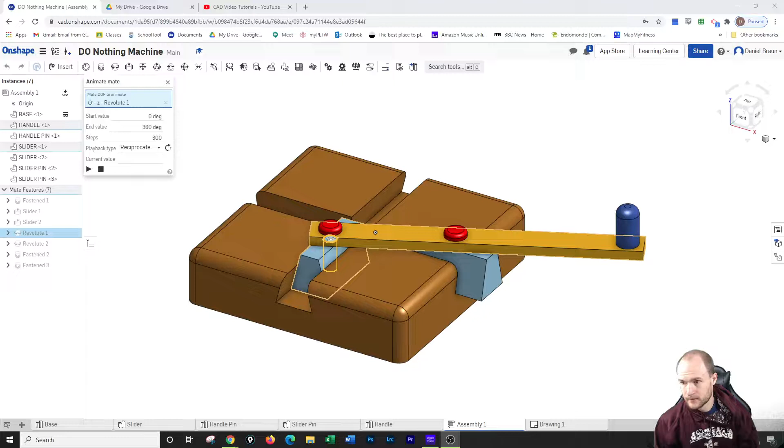Alright, so we're going to make this do nothing machine, and before I get started, I got this idea from this gentleman's channel, CAD Video Tutorials, and it's basically the same one he has. I made some minor changes in the way I draw it and some of the things I do.

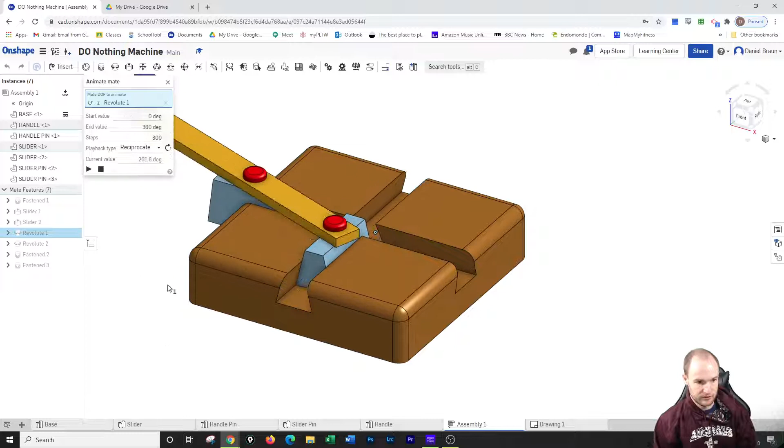If you are interested in other Onshape things, he has some good tutorials you can go check out. So, this is the do nothing machine. We're going to do this assembly, so we're going to draw all the parts, and then we're going to put them together and you'll be able to animate it like this.

So it's going to be our first step with assemblies. To do this, I made a folder, the do nothing machine, and then you're going to create a document. Different from Autodesk Inventor, you are going to actually be able to put everything in one document, which is really nice. So like this is the Part Studio one.

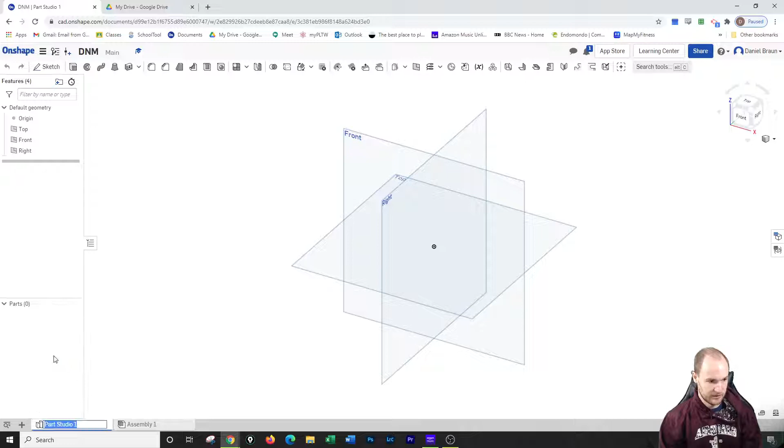I'm just going to rename this because this is going to be the base. So I'm going to make a video for each of the pieces. Moving on, so we're going to do the base first. So here is the base, and here are the dimensions for the base.

So everything we're doing is in millimeters because it just works out nice. So we're going to do 150 by 150. And then we're going to cut these grooves in. I've got a detail for the grooves here.

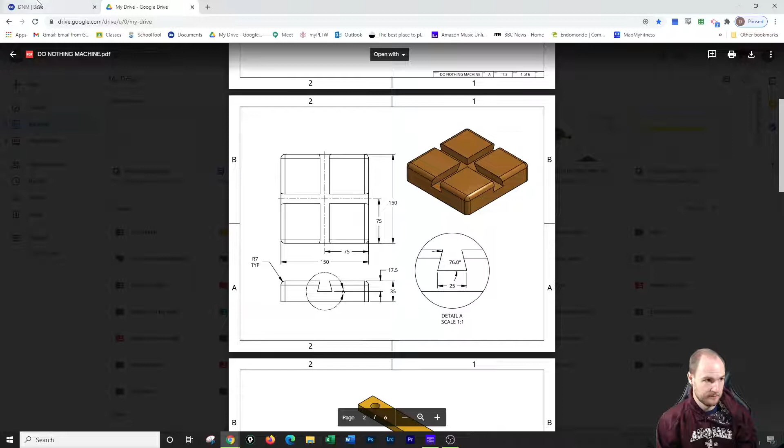So I'm going to start by making our basic shape. To do that, I'm actually going to make it on the top face, and it's just going to be a center point rectangle here. And I'm going to make that as - got to go to my document settings, or document workspace units right here. I want to make those into millimeters.

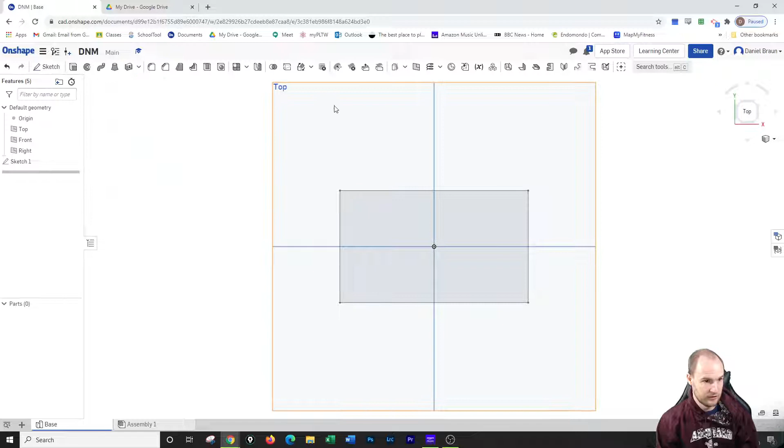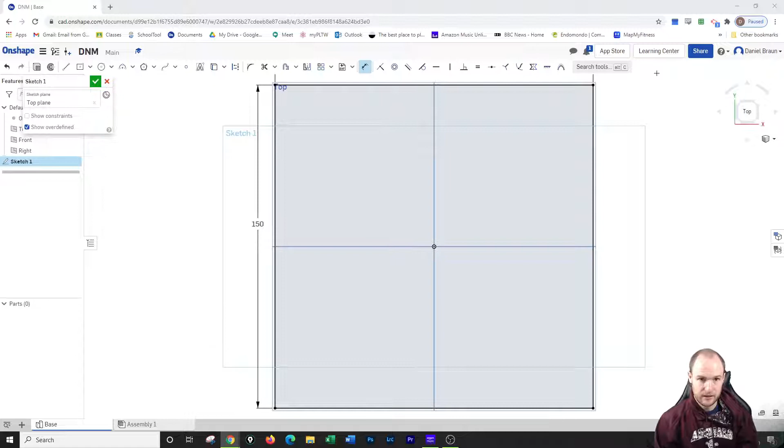So now this is going to be, if I go back into the sketch here, 150 by 150. I'm actually going to drag the dimensions off page so I can see them in real time. I'm going to hit finish sketch here, and I am going to extrude this to 35 millimeters.

And I have to click what I want to extrude. So there we go. Next, I'm just going to pick a side, any side. So I'm going to pick this side right here.

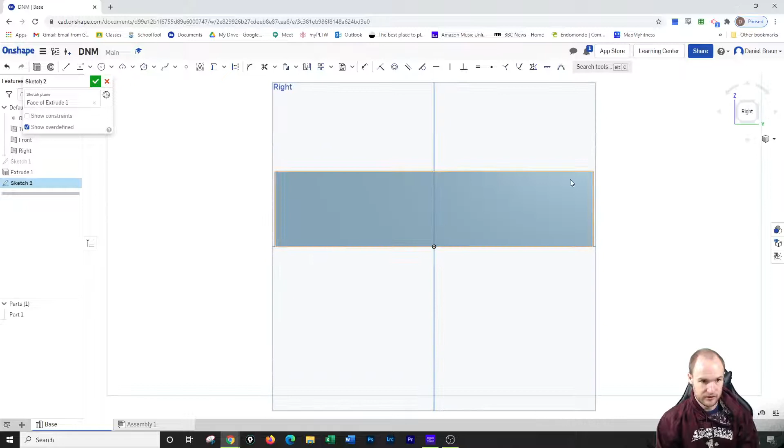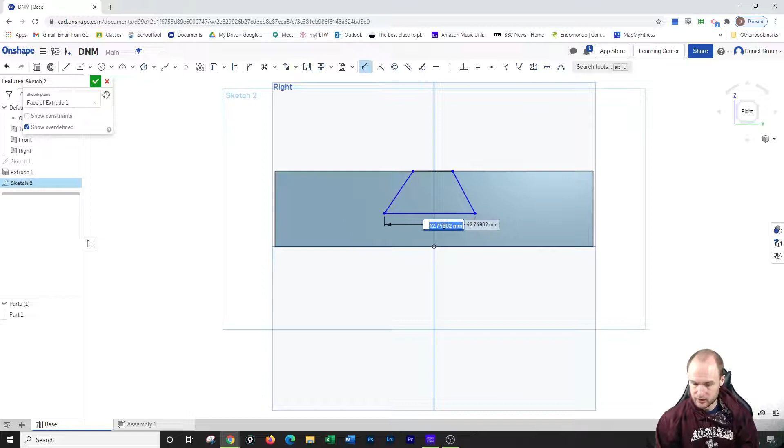And I am going to do a little drawing on here that is going to become my dovetail slot, because that's what this shape is - it's a dovetail. We got some dimensions on here, like the bottom line here should be 25. This angle from here to here on the inside edge should be 76, and it should be 76 on the other side as well. And then we just have to worry about the height.

So the height from here to here, come on dimension, height from here to here, that should be 17.5. And it should be centered. So like the center of this line should be on the center of this line. So they should be on the same vertical.

That's why I drew this with the center point rectangle, so I could put them on the same vertical. So it's not letting me grab the center point of the line, which is an issue. So what I have to do is dimension it accordingly, and I can do that quite easily. So it's going to be 75 for the middle, and then minus the middle of 25.

So 25 divided by 2, whatever the middle of 25 minus 2 is, will be the middle of this line, and then 75 is the middle. So it's 75 minus whatever the middle of that line is, and that'll give me 62.5. And if you don't believe me that that was correct, we can go and check it on the other corner.

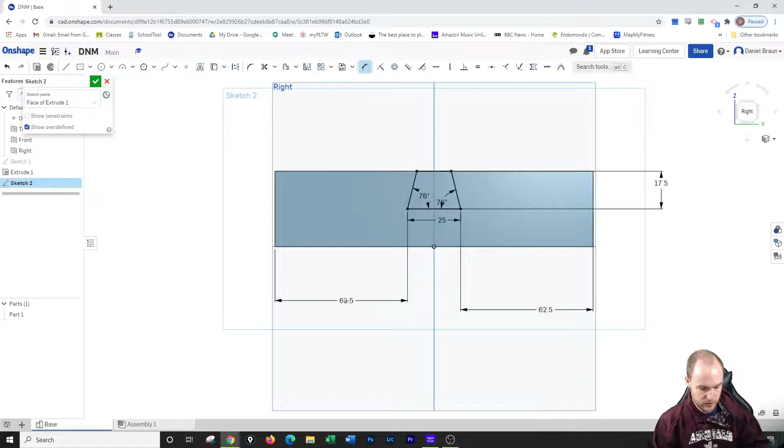So I can go and check it on this corner right here. And if this is 62.5, we are in business, which we are. Alright, so I'm going to hit finish sketch. And I'm going to extrude this, and I'm going to hit remove, and I want it to go through all. Great.

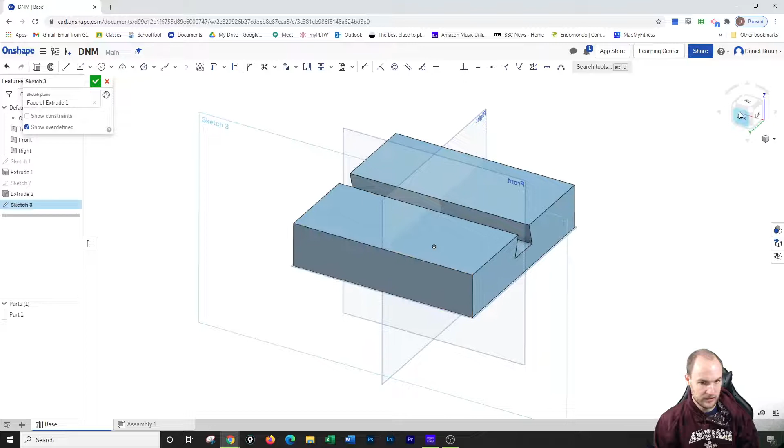Alright, and now I'm going to go over here, and I'm going to click on this face right here. And I'm going to go back to sketch 2. And I want to copy the sketch, and I want to paste the sketch entities right onto here.

And I do have the ability to move stuff around a little bit, but I'm just going to drop it down because I can dimension it in a moment. So it copied all the sketch entities, so I'm going to make from here to here 0. And then I'm going to make from here to here 62.5, because I remember that from the other one.

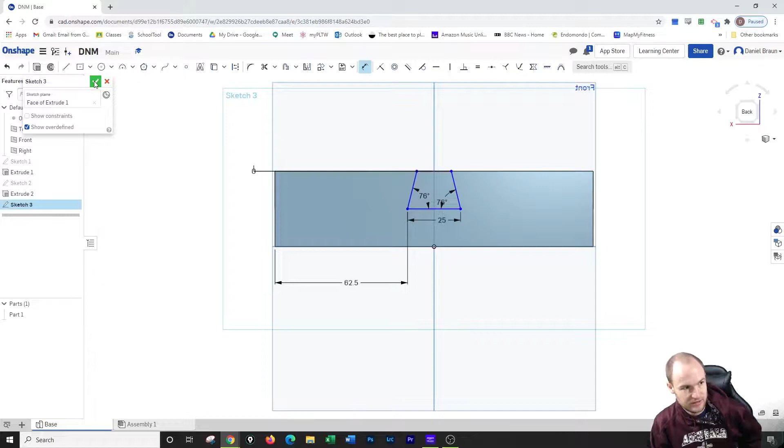So that very quickly saved us some time with copying the sketch and using the sketch entities. I was able to just use 2 dimensions to quickly put it where I wanted it, which was right there. And once again, I am going to remove this sketch through all.

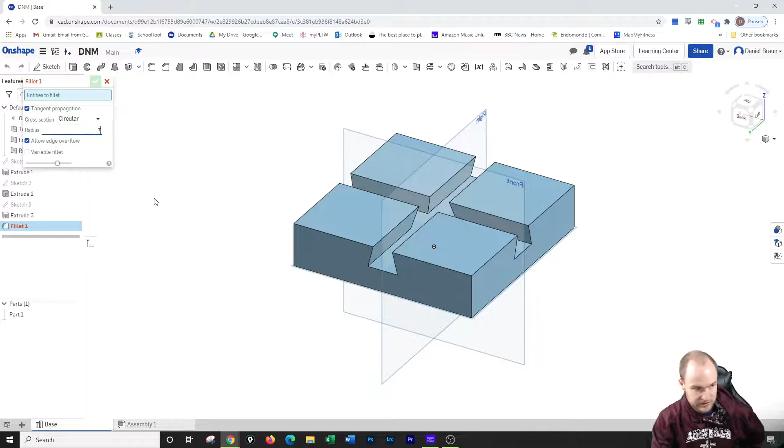Alright, my next step is I'm going to round the edges, so I put a fillet on these with the fillet tool. It's actually a round, and I made my dimension be 7 millimeters, and I just click the edges I want. Notice if you click the whole top, that's no good, because I don't actually want the whole top. I just want the outside edges. So go around and get all the outside edges.

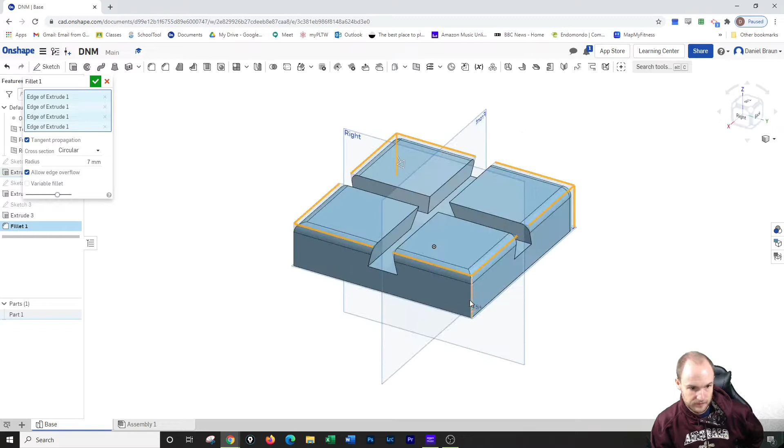Like so. Alright, so that gives you all of the outside edges.

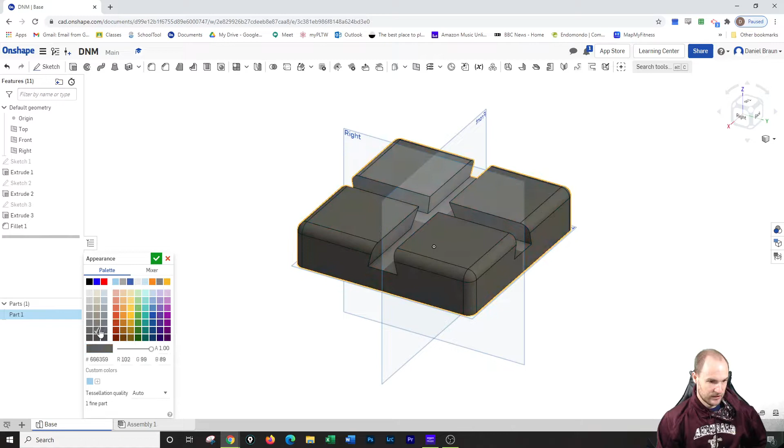When you're finally done with this, you can go to the part and you can go to edit appearance. I'm just going to make it a darker brown of some kind to emulate kind of wood. We'll go with this, that looks good.

And I'm going to call this in all capitals, rename, and I'm going to call this base, just like I did here, and this should be in all capitals. So after you're doing that, you are done with the base.